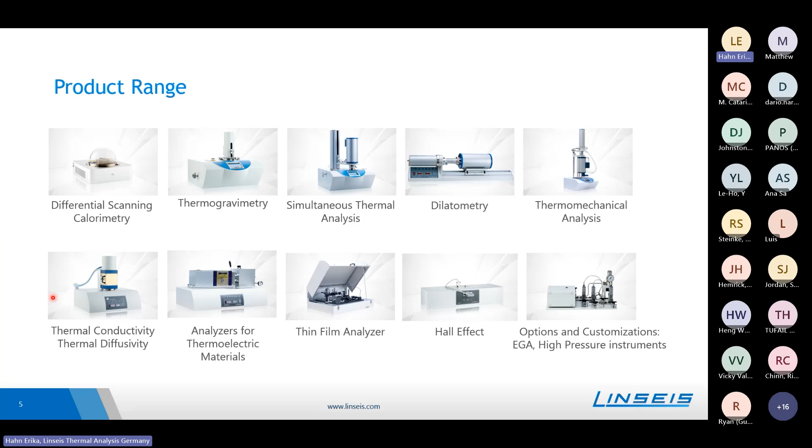Today we will have a look onto the thermal conductivity. What is this property and how to determine that? So that will be the introduction. Later on, we will then have a closer look onto the instruments we provide for thermal conductivity analysis, which are the laser flash analyzer, the transient hot bridge instrument, the TIM tester, and the heat flow meter. After that, I will summarize that and give an outlook in the end for the thin film characterization, so that now I will focus more onto bulk materials.

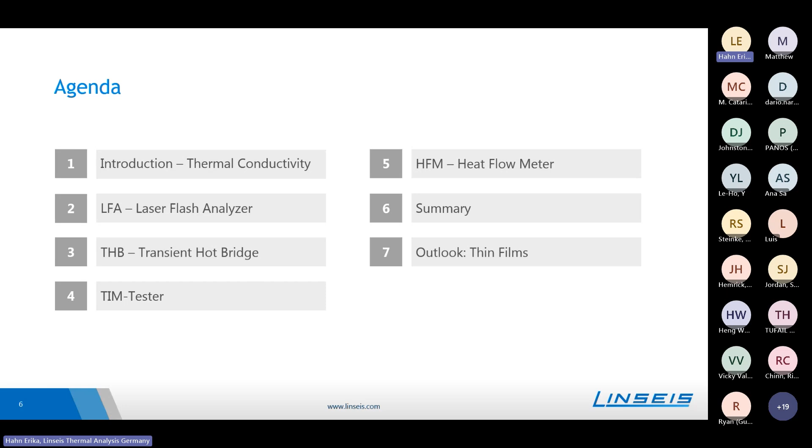In general, heat can be transferred by three main processes, which are radiation, conduction, and convection. Radiation is the emission of electromagnetic waves, and all materials radiate such thermal energy. Convection describes a particle stream in heated liquids which carry the thermal energy. Good examples here would be a heater or the Gulf Stream.

And then what we will have a look on later on as well is the conduction, so the thermal conduction. Here, no material will be transported, so the propagation of heat will be contributed by phonons, so lattice vibrations, or electrons. So electronic contribution is dominated in metals.

With metals, there is also the Wiedemann-Franz law, which is quite helpful, as this law relates the thermal conductivity with the electrical conductivity, so that both properties are related via the so-called Lorenz factor L and the temperature. So if one measures one of these properties and knows the Lorenz factor and the temperature, one can also find out the other property.

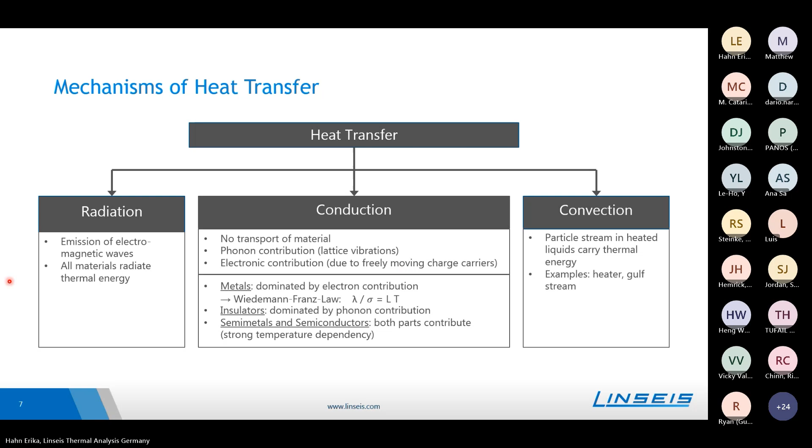To visualize those three mechanisms, this picture is, in my opinion, very helpful. So we have here a fire where the heat mainly is transported by radiation. On top of that, we have a pot with some water in there. The heat within the water will be distributed mainly by convection, and the handle of the pot will get warm because we have a metal pot, and the heat will be transferred by conduction. So that is a quite good illustration where such heat transfer mechanisms appear.

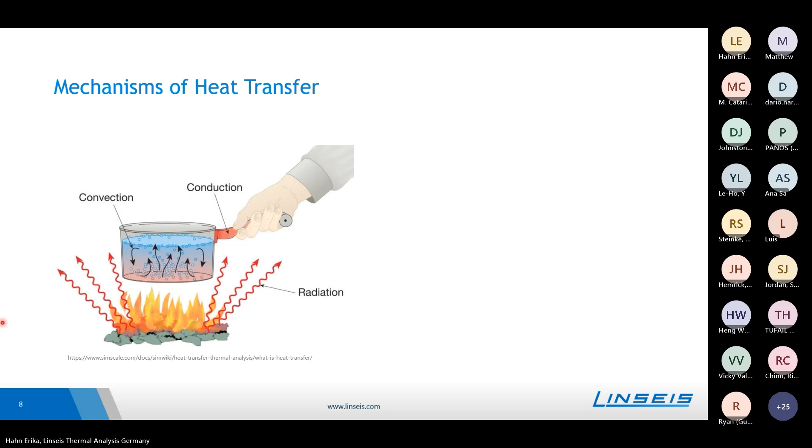Today we will then focus more on the heat conduction, and the conductivity is quite complex to classify because there's a very broad range of materials with very different thermal conductivities. For example, here on the bottom we have water and oil, so liquid materials, they have a quite low thermal conductivity. Insulation materials have an even lower thermal conductivity, and on the other side we have an extremely high conductivity, for example, with diamond with 2,300 watt per meter Kelvin approximately.

So we can see here we have a very, very broad range of thermal conductivities, and also quite a lot of different materials, metals, insulation materials, liquids, and so on. And these should be covered all in determining the thermal conductivity. So that is not possible with just one instrument typically, so there are different methods available to cover this complete range.

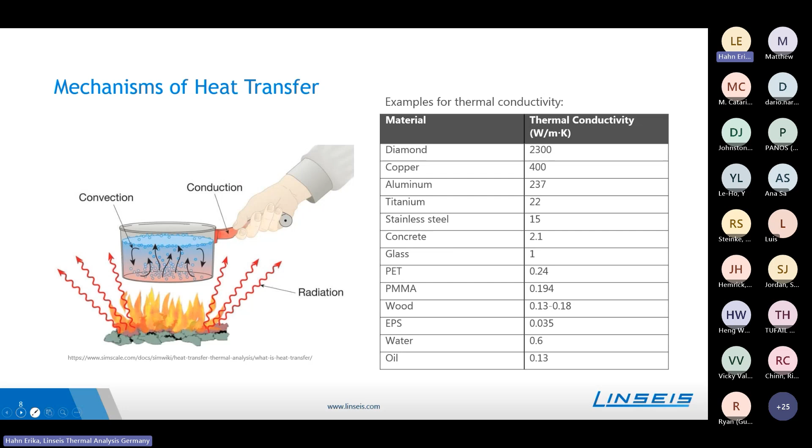Before we go on, we should have a look onto the two properties, thermal diffusivity and thermal conductivity, as some methods measure only one of that or even both of that, so it's good to know how to distinguish that. So the thermal conductivity is the property which is the main interest typically, and it's the ability of a material to conduct heat, so thermal energy. Here you can see the relation. So when I have a look onto the heat flow through the sample, I need to know the geometry of the material, and a temperature gradient should be applied on the sample.

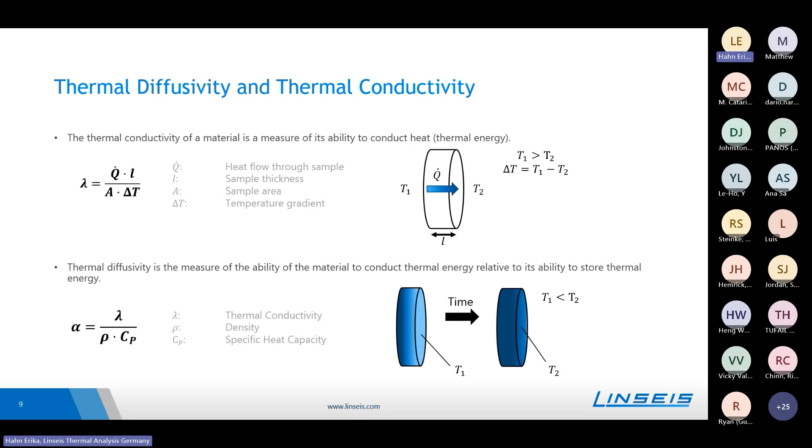The thermal diffusivity is the measure of the ability of the material to conduct thermal energy relative to its ability to store thermal energy. It's closely related to thermal conductivity, and you see here a picture on how to describe that. So, summarizing, thermal diffusivity is the propagation of a temperature difference. So, one can say that it is how fast the temperature difference is leveled out. You can see here the unit, it's meter squared per second. And the thermal conductivity is how good heat energy is conducted through a material, so the propagation of a heat difference in a material.

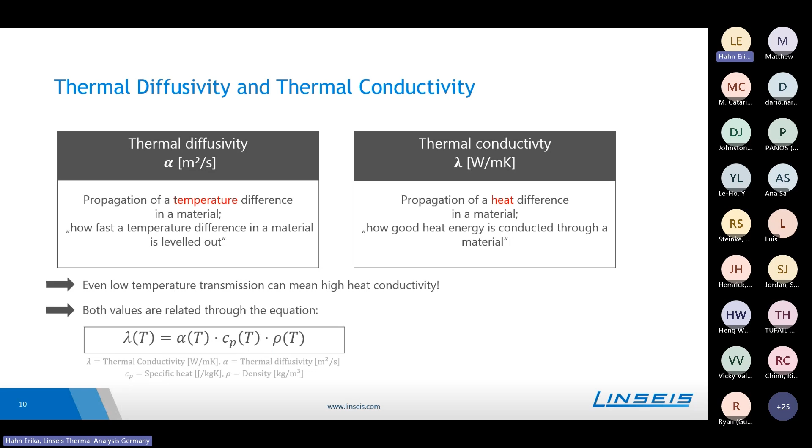Both of these properties are closely related, so one can keep this formula in mind where the thermal conductivity is the product of the thermal diffusivity, specific heat capacity, and the density. An important fact is here that all of these properties are temperature dependent, so that for a full analysis, one needs to find out each property at a different temperature. But mainly the thermal diffusivity as well as specific heat capacity show a stronger temperature dependency than the density, which in most of the cases is not changing that significantly with temperature.

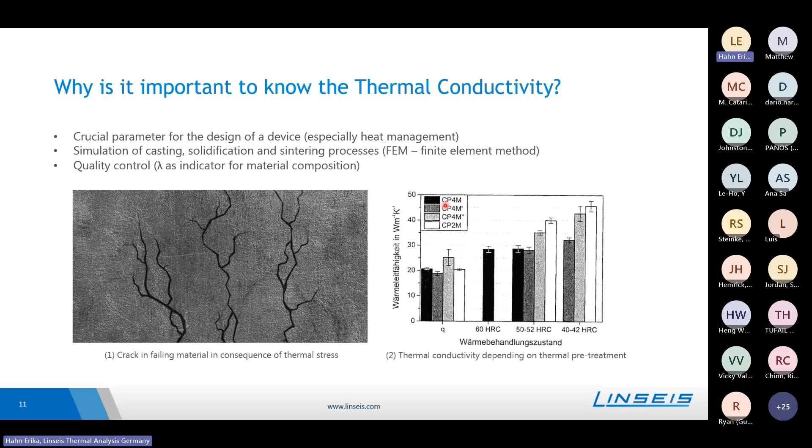As a further example, the conductivity can be used for quality control so that the conductivity is tested and will be used as an indicator for the material composition. So there are a lot of different possibilities where the conductivity is used, but I would say it is mainly used for simulation processes for the design of a device, for example.

Next, we will move on to how to measure the thermal conductivity. The methods can be mainly grouped into two groups. On the one hand, we have transient methods, and on the other hand, we have stationary methods. For the transient methods, the sample is subjected to a thermal disturbance, and the disturbance is observed as a function of time. So one brings in some heat in the material and has a look on how it propagates through that.

For the stationary methods or steady state methods, one applies a temperature gradient through the sample. So, like depicted here, one brings in some heat into the material and has a colder side on the other side. And here one waits until the brought in heat, or the portion of energy, will be the same as the one which will come out.

So waiting is a good point here because the stationary methods take typically longer or much longer compared to the transient methods. And this is also depicted here. So for a transient state, one already has a look onto the material when the heat is brought in. Within the steady state, one waits until the system is becoming stable and nothing changes anymore.

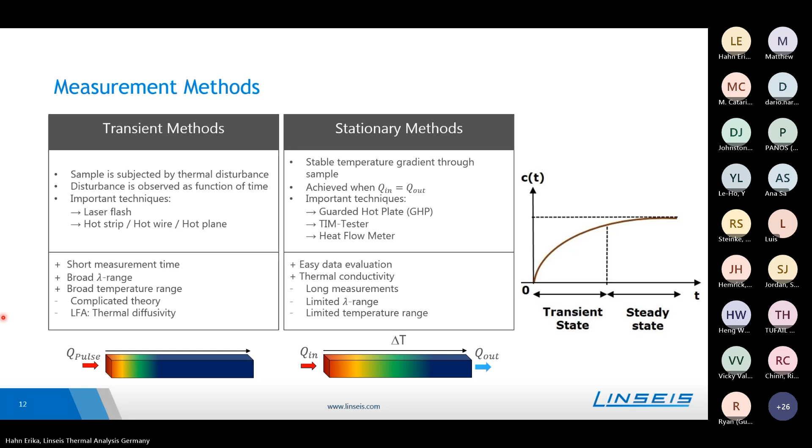So those methods are realized within our instruments for the thermal conductivity determination. On the left, we see both our instruments which follow a transient technique, so the laser flash analyzer and our THB, the transient hot bridge instrument. And on the right, we see our stationary measurement methods, which are the TIM tester and the heat flow meter, shortly HFM.

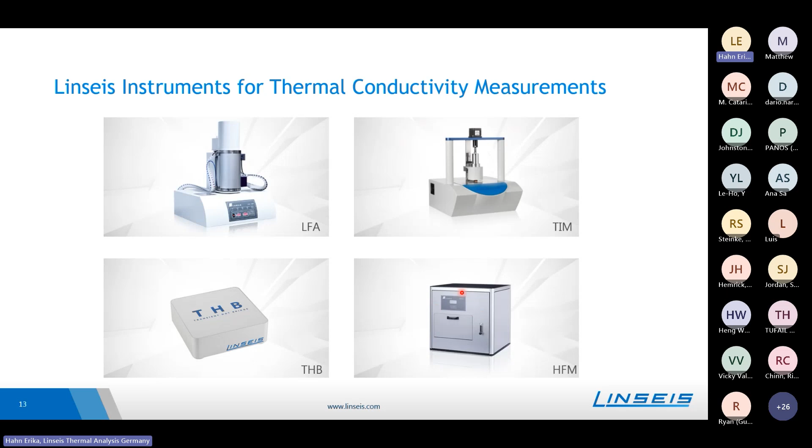On this slide, you can see a short illustration of where these instruments can be applied. You can directly see that the THB as well as the laser flash have a very broad range of thermal conductivities which they can cover, so that the full conductivity range is covered here. The THB as well as the laser flash can cover a very high temperature range as well. The LFA, for example, can go up to 2800 degrees.

The steady state methods, the heat flow meter and the TIM, are quite narrow in their measuring range, so that the heat flow meter is mainly used for insulation material and the TIM tester for moderately conductive materials. So in the next section, we will have a closer look at each of these instruments, and we start with the laser flash.

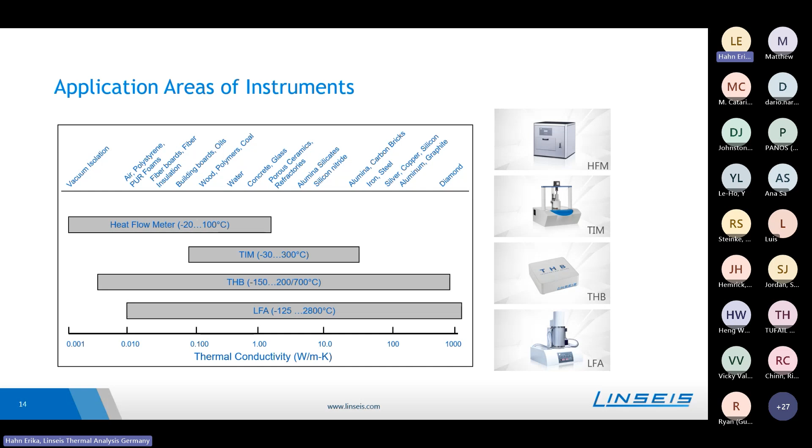The laser flash is a very useful technique as it can cover a lot of different conductivities and a quite broad temperature range. The laser flash setup is a standardized test method according to this ASTM norm for the determination of the thermal diffusivity. For the test, a small and thin specimen is subjected to a high intensity, short duration radiant energy pulse, and the energy of the pulse is absorbed on the front surface of the sample and distributes in there, and the resulting temperature rise at the rear face is recorded.

So this is illustrated here. We have a power source, which is in our case either a xenon lamp or a laser source. We have the sample and an infrared detector on the right side of that to collect the signal. A typical signal will look like that. So we have here the temperature rise with time. For the evaluation, the sample thickness is required, as well as the time required for the temperature rise to reach half of its maximum value, like it is depicted here. So half of the temperature rise, and we then get out the time here.

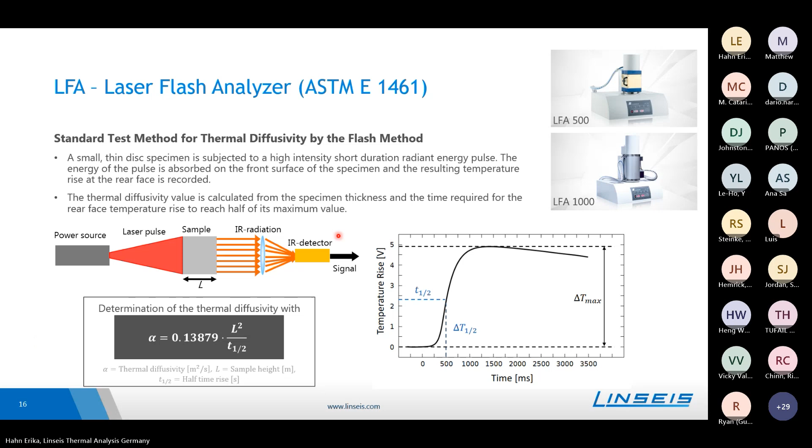This measurement method is realized in our instruments like that. Our LFA 500 series uses a xenon lamp as a power source, the LFA 1000 series a laser source. Both of these energy sources are located at the bottom of the instrument, and the beam will be directed to the sample. The sample will be in a sample robot, which can contain up to 3 or 6 or even 18 samples at the same time. The sample robot will be located in a furnace, and we offer a lot of different options to cover in total the range from minus 125 degrees Celsius up to 2800 degrees.

And on top of this configuration, on the same beam path, there will be a detector located which catches the infrared radiation emitted by the sample. The detector will be either a Peltier-cooled one or a liquid nitrogen-cooled one. So typically we use indium antimonide detectors, or for the low temperature range, we use an MCT detector.

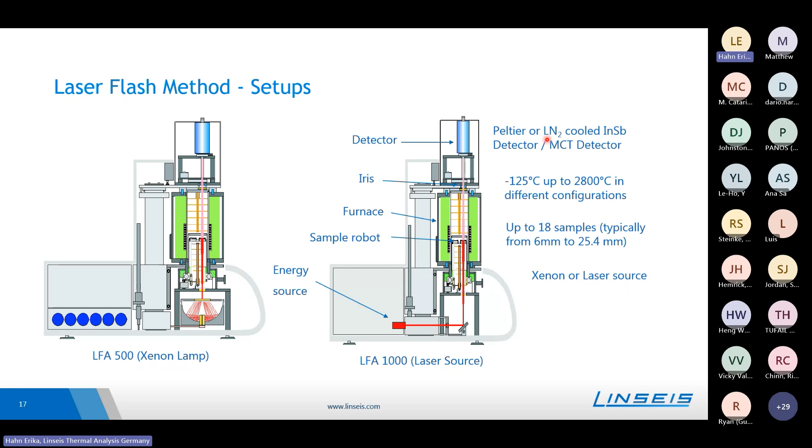As already mentioned, we have the sample robot inside the furnace, which can either carry 3 or 6 samples. These are our typical ones. And we also have one for up to 18 samples. Mainly, the device is used for solid samples with such sample holders ranging from diameter 5 mm to 1 inch, or can be squared with 10 or 20 millimeter as a side length.

But we also have some special sample holders. So, for example, one for pastes, powders, and liquids, or for some in-plane measurements. The sample preparation is quite simple, so one needs to prepare the sample according to the size of the sample holder. We cover then both of the sides with some graphite spray. This is done to maximize the absorption and emission of the sample.

Then this will be covered with a lid to avoid that any light or laser light will come through the sides directly to the detector. It will be placed here in the sample robot like that, covered as well with a lid to have a homogeneous temperature distribution within the sample container. And then we can close the furnace and do the measurement.

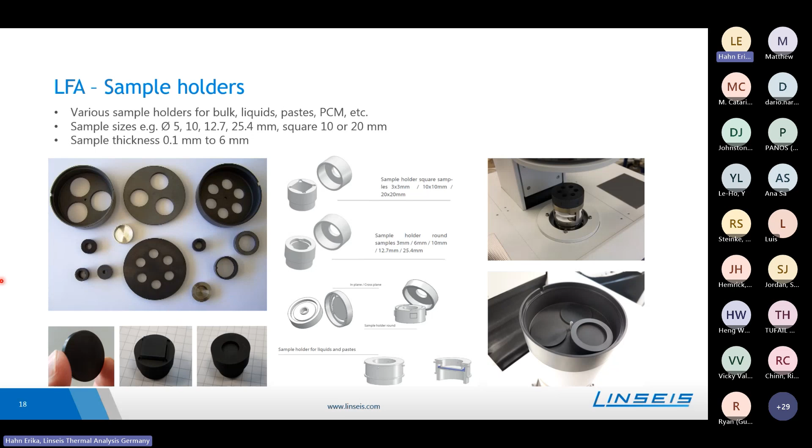As mentioned before, we find out the thermal diffusivity using this temperature rise with time curve. It is not as simple as just doing it graphically as indicated in some slides before, but for the evaluation, we use some models. And the basic model would be the adiabatic model, describing the heat transfer or heat transport within a material. However, the adiabatic model assumes the ideal case, but in reality, typically this cannot be fulfilled.

So there are some corrections which need to be done, which is in the case of the laser flash, mainly the heat loss. So the heat loss from the sample to the sample holder or the surrounding, as well as some finite pulse length effects appear, especially for fast and thin samples. So there are a lot of scientists who thought of how to correct these effects, and there are a lot of different models. But mainly the well-known models either consider the heat loss or consider the finite pulse length.

What is unique then for our instrument is that we have this model developed by Dr. Laszlo Dusza, which is the so-called combined model. And this model considers at the same time the heat loss as well as the finite pulse effects, so that this evaluation model is quite universal and can be used for almost every material, so that it's our default model evaluating almost every sample we test.

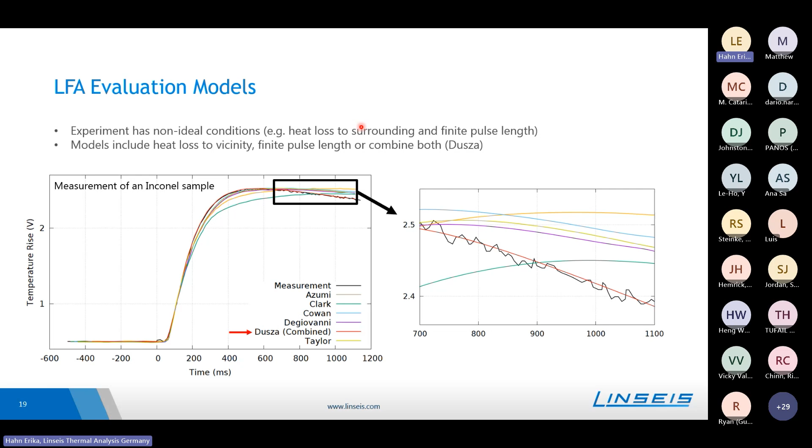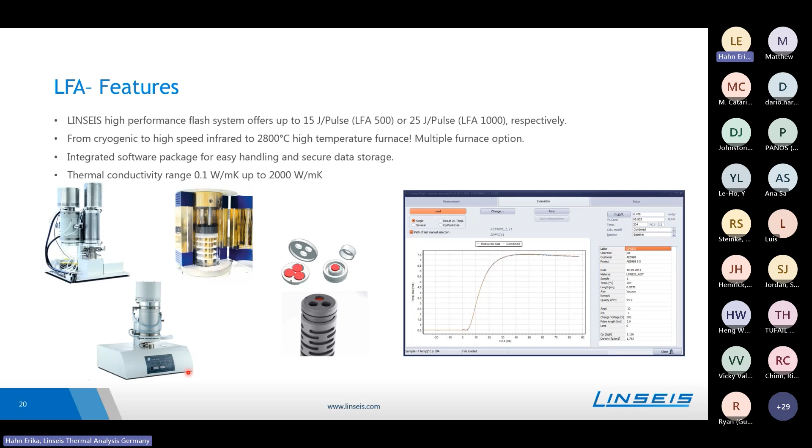So the next instrument we will have a look on is our THB. THB stands for transient hot bridge, and this method was developed in cooperation between the German Metrology Institute PTB, the Physikalisch-Technische Bundesanstalt in Braunschweig, and yes, the instrument was launched in 2011.

The THB allows a fast and easy measurement of the thermal conductivity as well as the thermal diffusivity. With knowledge of density, one can also calculate then the specific heat. There are three different models: the basic, advanced, and ultimate, which each allow different ranges of thermal conductivities. In total, we can cover insulation materials to even very high conductive materials.

Also in a quite broad temperature range from -150 to 700 degrees, and the samples can be solid, liquid, powder, or pastes. For each application, we have different sensors. So first of all, we have two groups, which are the Kapton sensors and the ceramic ones.

The Kapton-based sensors are all based on Kapton foils, where in between some wires are embedded, and these can measure up to 200 degrees Celsius, whereas the ceramic versions of the sensors are then for the high temperature application up to 700 degrees Celsius.

So here you see the size of typical samples. So we're in the range of a few tens of millimeters, so much larger samples compared, for example, to the laser flash. Sample thickness is ranging typically from 3 to 20 millimeters, and for the sample preparation, in case of solids, we need two sample pieces so that the sensor can be sandwiched in between.

This means that the sensor needs to be surrounded completely by the material which needs to be tested. To improve the contact between the sensor and the sample, we compress the complete configuration, for example, with such a sample press or with a weight.

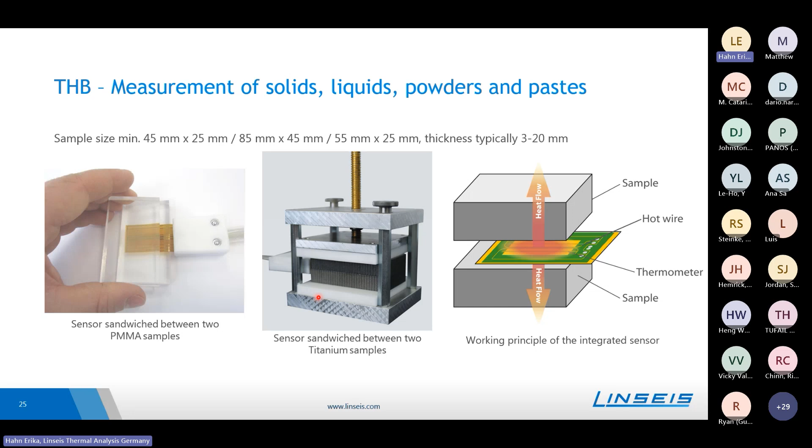In case of liquids and powders, we also need to bring the sensor from both sides into contact with the material. With liquids, it's quite easy. One just takes a beaker and hangs the sensor inside. So also here, as well as with the powders, with our special powder sample container, we use the metal framed sensor to have it more stiff so that it does not bend. Here, just the tip cannot be seen due to the water.

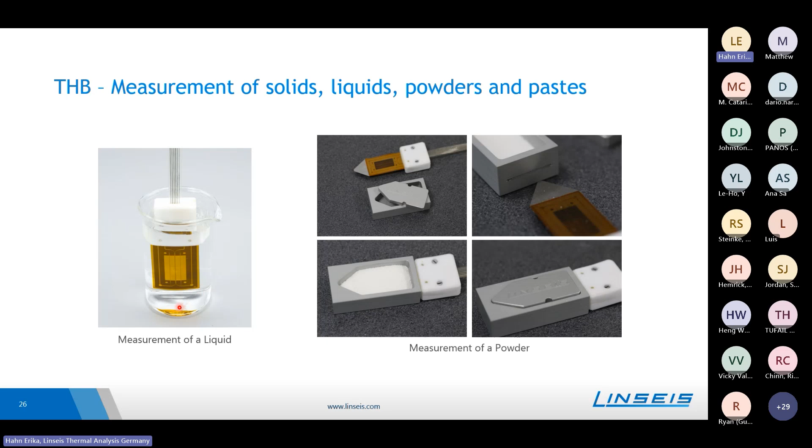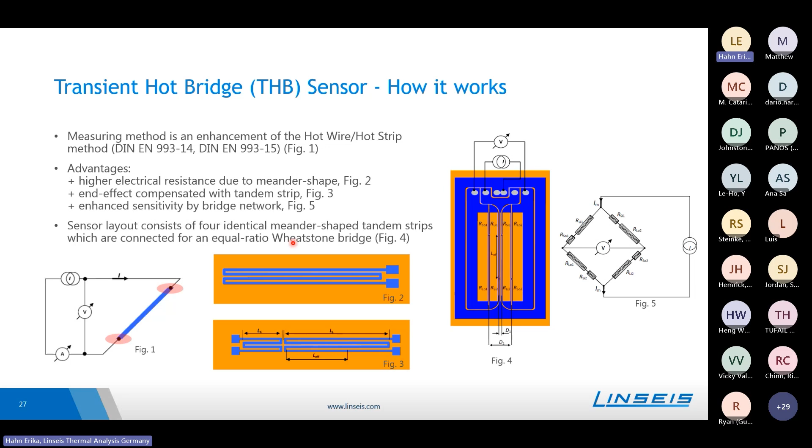But how does the sensor work? The next two slides should explain that. So basically all of the sensors are an enhancement of a hot wire technique. The design was just changed so that we have not just one wire, but a very long wire with a meander shape and separated. And in total, within the sensor, there are four of these wires at different distances, and these wires are connected to a bridge. This is also why the bridge is in the name of the sensor.

During the measurement, the sensor serves as a Joule heat source and at the same time as a resistance thermometer. So during the measurement, the sensor emits a constant heating current and also heats itself. So like shown here, we have the samples, and during the measurement, the hot wire or the sensor will heat up the sample.

The temperature rise of the sensor over time is a measure then for the thermal properties of the sample, so the surrounding material. But we do not measure directly this temperature rise, but have a look at the bridge voltage, which is directly proportional to that, and a typical signal will look like that. So we will have the bridge voltage, which is rising with time.

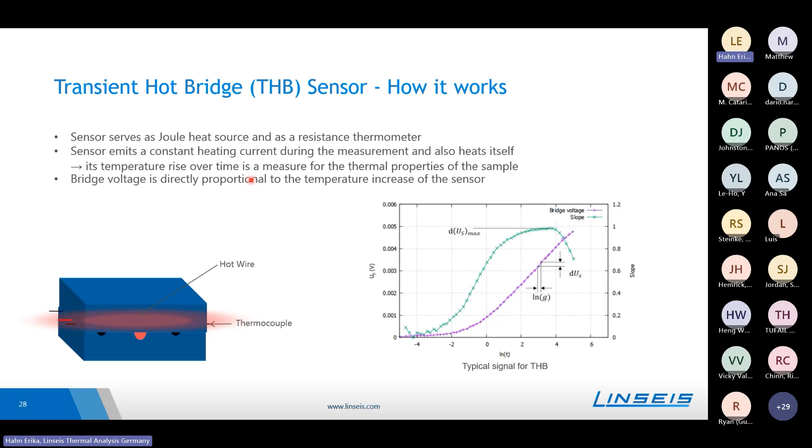For the evaluation, we will have a look at the derivative of that, so at the slope. And the thermal conductivity can be extracted here from this turning point where the slope changes. The thermal diffusivity can be determined as well based on this decay of slope after the maximum. The QSS sensor and the hotpoint sensor work according to the same principle, but the evaluation and the measurement curve just look different.

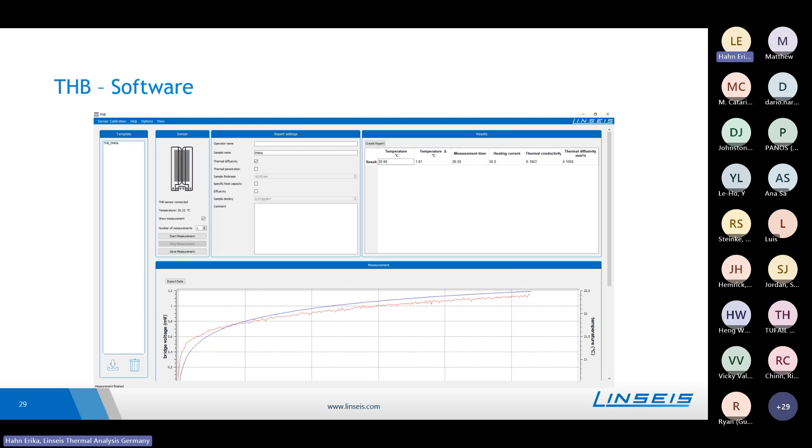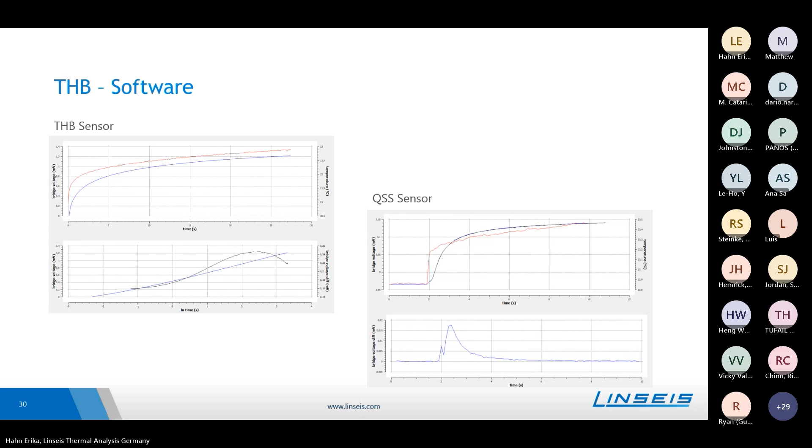And what we have new in our accessory range is the so-called single-sided sensor, which requires only one sample piece, so it's not necessary to sandwich the sensor in between two sample parts, so it's quite good to use if one has just a limited amount of sample and/or cannot destroy the sample. Furthermore, the sensor is mainly recommended for high conductive materials.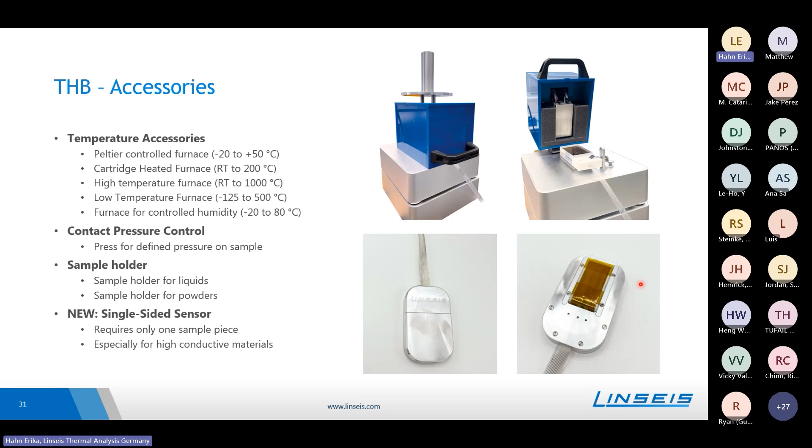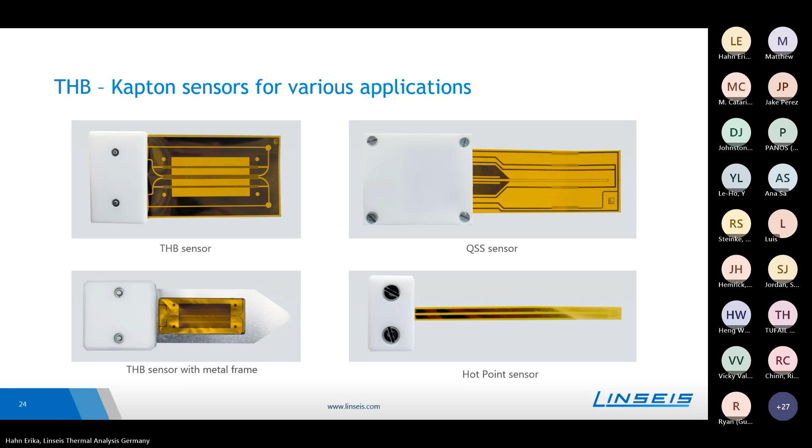As a further comment, which I forgot to tell before, the system itself is based on a plug and play system, so it's possible to use the same main unit with different kinds of sensors, so one can just unplug one sensor and replug a new type of sensor. So that would be the closer look onto our THB instrument.

Now we go further to our stationary measurement methods. First, we start with the TIM tester. TIM stands for thermal interface materials, so the instrument is mainly used for such thermal interface materials, which are used in power electronics, for example, and typically cover thermal pastes, greases, or pads. These TIMs are mainly flexible materials which connect two different parts and should close the voids in between those two materials to enhance the contact so that the heat can propagate much better. This is often used in computers and electronics to bring the heat away from the electronic parts so that they do not overheat and fail later on.

So for such materials, the thermal conductivity is relevant as well as the contact resistance to different materials. And for that, we have our TIM tester, which also functions according to a standardized method, which is the ASTM D5470. Furthermore, it allows some aging studies, so one can do some thermal or mechanical cycling with the material to check how the material will behave over time or with heavy use.

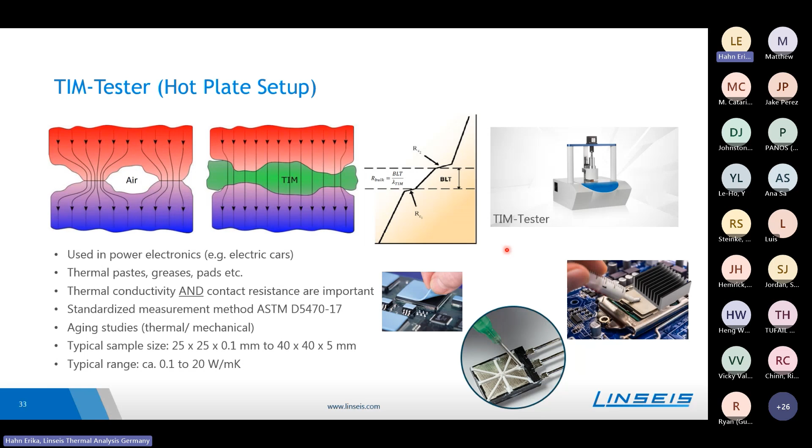There are quite a lot of different TIM materials. These can be mainly grouped into these parts. Type 1 materials are pastes, greases, or phase change materials, for example. Type 2 materials are viscoelastic solids, some flexible material like a pad, tape, or foam, and the third group will be the solid group. In the case of TIMs, these are mainly polymers, metals, or ceramics.

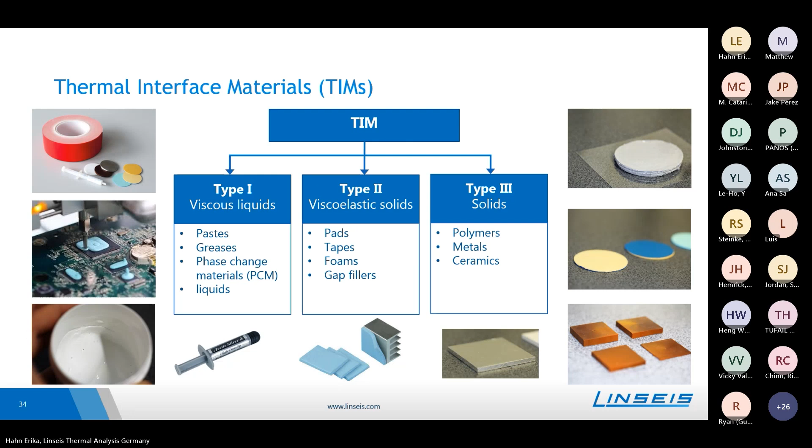As indicated before, the instrument is built according to a standardized method, the ASTM 5470 norm. The norm describes in quite some detail how the instrument should be set up. Mainly, we have two plates. We call them meter bars, and these have temperature sensors built inside, so thermocouples. And for the measurement, the sample will be clamped in between those two meter bars.

One of the meter bars, which is in our case the upper one, will be heated and the lower one will be cooled, so that we will have a temperature gradient over the sample and thus a heat flux through the sample. To enhance the contact between the material and the meter bars, we also need some contact force, as within the THB tests.

During the measurement, the so-called thermal impedance is calculated. For that, we need the sample area as well as the heat flux and the temperature gradient over the sample. The thermal impedance is the sum of thermal resistances from the top to the bottom, so the sample's thermal resistance as well as the contact resistances from the sample to the meter bars.

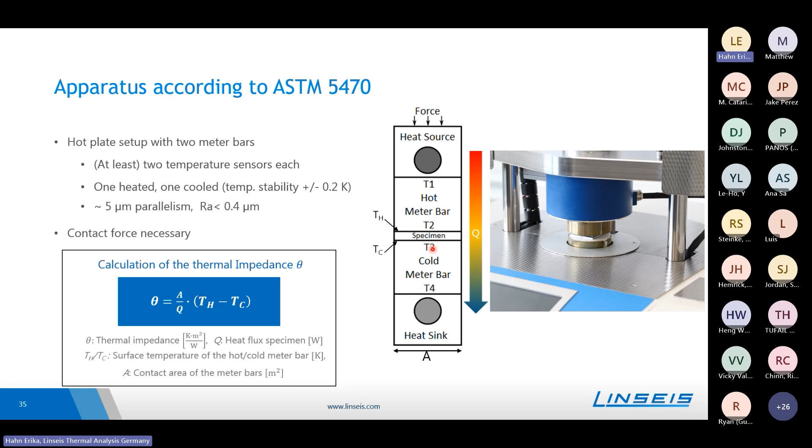Our TIM tester is set up like the following. We have here those two meter bars with a couple of thermocouples built inside to determine the heat flux. And we also have some cartridge heaters inside the meter bars to be able to measure at higher sample temperatures. The lower meter bar will be also connected to an external cooling unit so that the heat can be brought away from the material.

On the rear side, we have an LVDT built inside to be able to measure directly the sample thickness or control the sample thickness in case of pastes, for example. And on top of the instrument, we have an actuator which can apply some pressure onto the sample. This pressure can be software controlled, so it's also possible to do some pressure dependent tests on different kinds of materials.

Mainly the instrument is used from room temperature up to 150 and can be used for materials with a thermal conductivity range of 0.1 to 50 watt per meter Kelvin, but mainly the thermal interface materials go up to 20 watt per meter Kelvin, so that the upper limit can be used for some further materials.

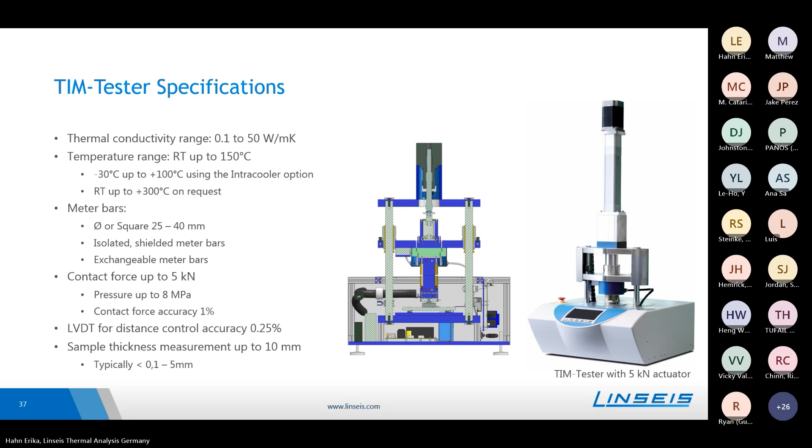Mainly the samples are constructed in such a way that the thicknesses are between 0.1 to 5 millimeter. In general, the system can measure samples up to 10 millimeter. This mentioned ASTM norm does not only describe how the instrument should be set up, but also determines how the measurement should be done as well as the evaluation.

For determining the thermal conductivity of a material, it is necessary to test the thermal impedance of 3 different sample thicknesses. As the system will firstly measure the thermal impedance, which still has the influence of the contact resistance between the material and the meter bars, there should be a method on how to subtract this contact resistance. And that is done by linear regression, so that we test different sample thicknesses where the variation will be the thermal resistance of the material, but the contact to the meter bars will be still the same, so that we will get in the end a linear relation like that.

And out of this curve, we can find out the apparent thermal conductivity of the material, which is the inverse of the slope. And the offset of the curve will correspond then to the contact resistance between the material and the meter bars. So that is how the measurement principle works.

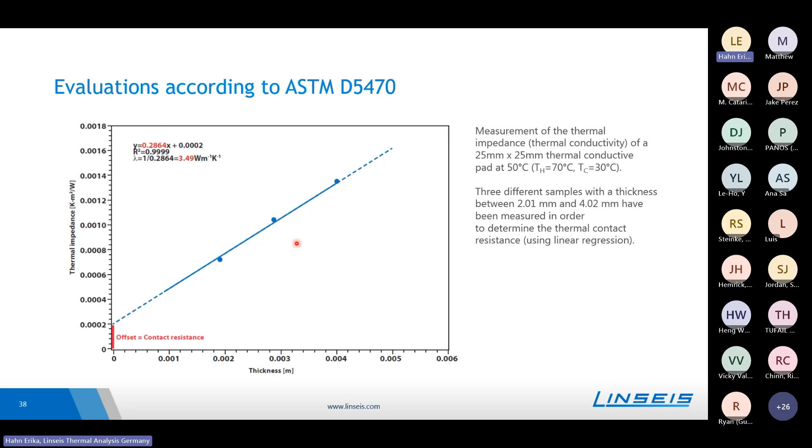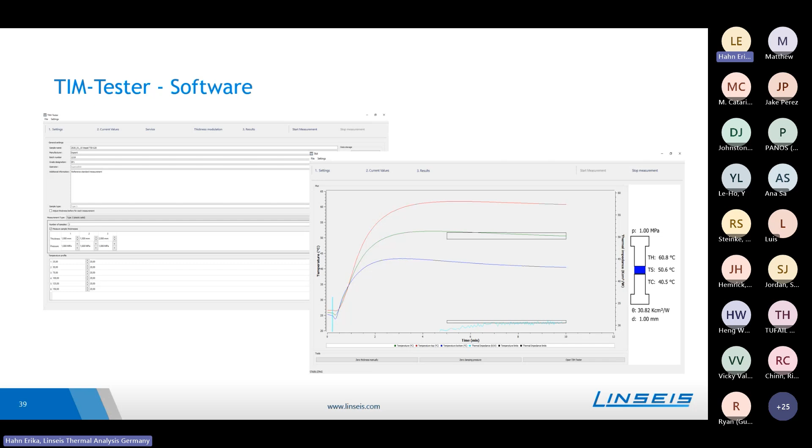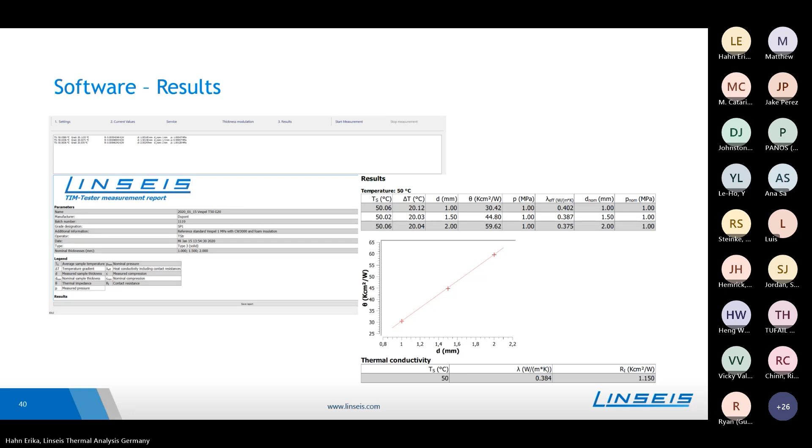A similar measurement technique and setup uses our heat flow meter. The heat flow meter is also a stationary measurement method using two plates where the sample will be sandwiched in between. One of the plates will be cooled and the other one will be heated to generate a temperature gradient and a heat flux through the sample. This heat flow meter is also designed according to several norms, ASTM, ISO or DIN norms. And as told before, the instrument is mainly used for insulation materials or building materials.

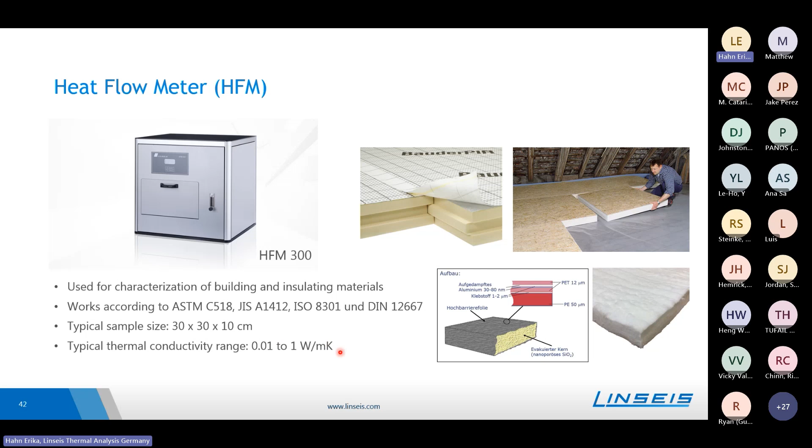Here, size typically does not matter, so typical sample sizes are in the centimeter range. With the HFM 300, the samples will be 30 times 30 centimeter, and thicknesses range up to 10 centimeter. You can also see from the typical thermal conductivity range that we move in the very low range of conductivity.

Out of the measurement, we can calculate the so-called heat transfer coefficient, also well known as the U value. This value is often used in the building industry or insulation material industry to compare different materials. We can also calculate from the heat flux and the sample geometry the thermal conductivity as well as the thermal resistance of the material.

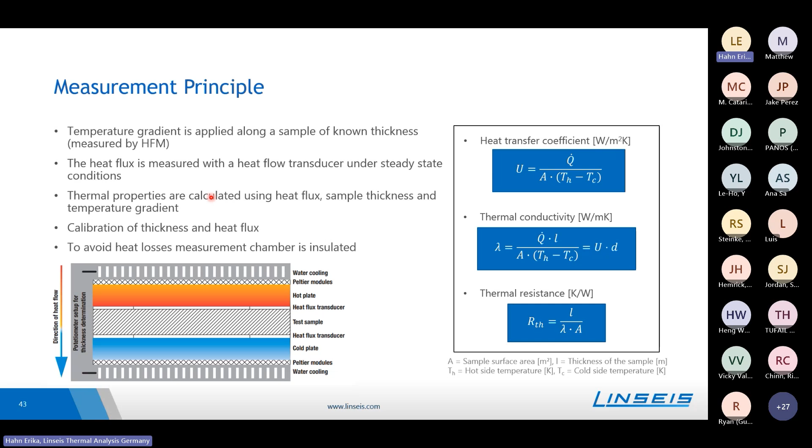As mentioned before, steady state measurement methods take quite a while, so with the heat flow meter, tests mainly take half an hour or 1 hour at one temperature. With laser flash measurement, for example, one shot at one temperature takes about 1 second, so it's much faster compared to these steady state measuring methods.

So now we had a closer look at the different instruments we offer for bulk materials. Quickly summarized, we have the laser flash. It's a quite universal instrument and can test insulation materials up to very high conductive specimens. It mainly determines the thermal diffusivity in a very broad temperature range, can be used for solids, liquids, powders, and uses quite small test samples, whereas the other transient technique, the THB, is also quite universal, so one can test insulation materials up to high conductive samples.

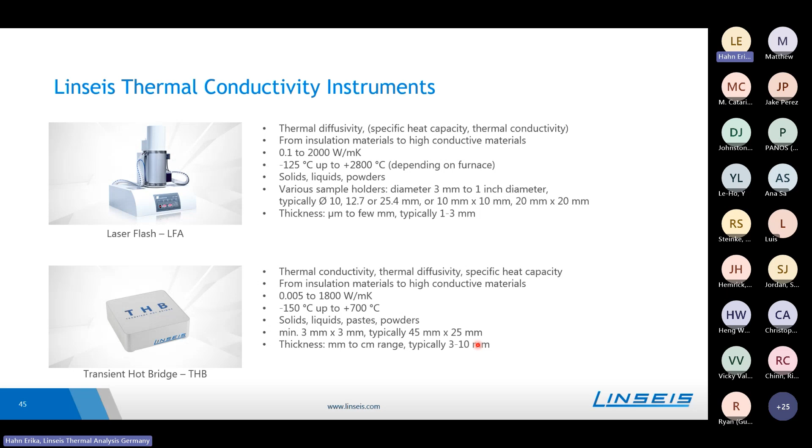Temperature range is a little bit more limited here, but it also allows the test of solids, liquids, pastes, and powders. Sample dimension is higher compared to the laser flash, but it's still not that large. In the same order of magnitude of sample size, the TIM tester works, which is a steady state measuring method for determining the thermal conductivity of moderately thermoconductive materials, mainly thermal interface materials like pastes, pads, or solids. Because of the application field, the temperature range is not that large, and the thickness and size range is in the lower millimeter, a few tenths of millimeter range.

The heat flow meter uses very large samples, which are mainly in the centimeter range. The thermal conductivity range is very low, so it's mainly used for insulation materials or building materials. Because of this application, the temperature range was designed accordingly, so also a moderate temperature range.

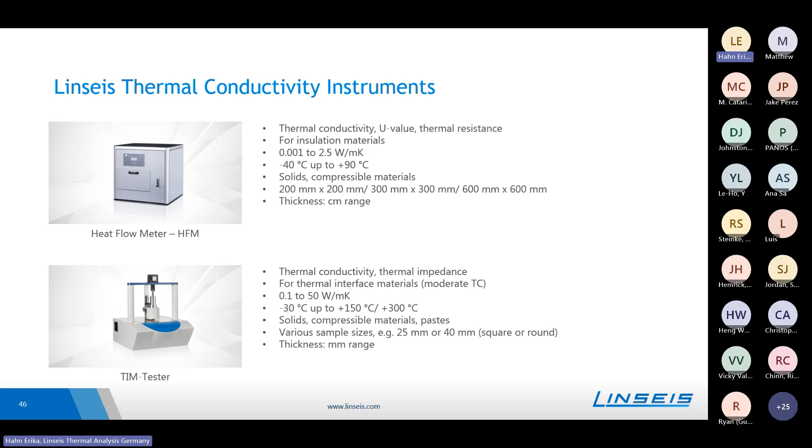The big question is now how to decide which instrument can be used for a specific application. This is often not that easy because in the very beginning, different instruments can be used, and then one needs to step by step figure out the conditions to focus on just one instrument. So the choice of the measuring method depends very strongly on the application. So in the beginning, one needs to find out the following information.

So which type of material should be tested? Is it solid, liquid? Is it a powder? Can it be compressed? Has it a homogeneous or an inhomogeneous structure? What is the surface roughness? And so on. Next would be to figure out the thermal conductivity range. So if one has very high conductive materials, mainly the laser flash and THB only can be used.

Also, the temperature range limits the selection of the instrument. For very high temperatures, let's say starting from 300, 400 degrees Celsius, mainly only the laser flash can be used. For room temperature or close to room temperature applications, one can think about the THB or TIM tester mainly.

And furthermore, the size and the thickness of the material can also influence the choice of instrument. So if one just has a very small amount of sample available, it's also mainly the laser flash. For very large samples, which cannot be cut or treated any further, a THB will be the choice of instrument. And then, of course, one needs to think about some further measurement conditions. So the atmosphere, if one needs to apply some pressure onto the sample, and so on.

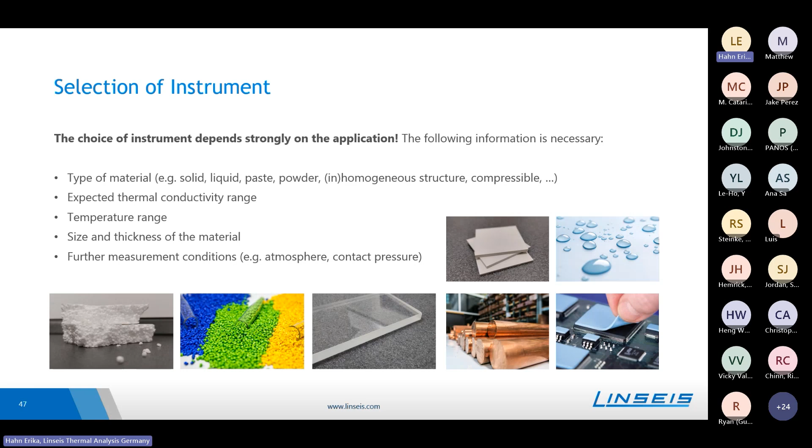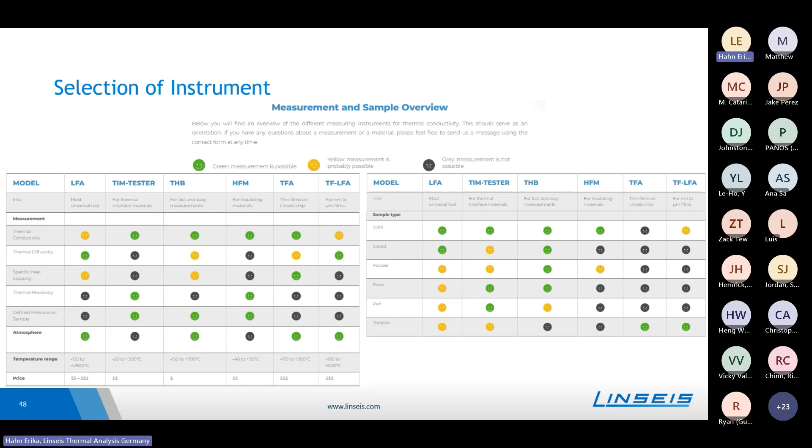So in this webinar, I focused mainly on the investigation of bulk materials, so solids, liquids, powders, and pastes. But a huge trend is to get instruments and parts smaller, so the miniaturization of materials, so that thin films are becoming more and more of interest. The production of thin films is quite complex, and also the characterization of thin films is more complex compared to bulk materials. But it's important to also test thin films, and not just rely on the data of the bulk material, because the physical properties of thin films might differ from bulk material.

This is often due to some parasitic surface effects, which are much stronger due to the smaller dimension. And the thin films also have high aspect ratios, which need to be considered and can influence the physical properties. So mainly the characterization is very important for semiconducting industries, but there are also many more different applications where these thin films are used.